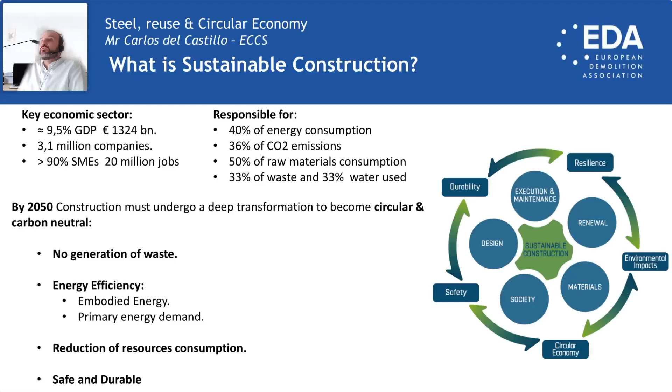In the end, we need safe, durable, and affordable buildings. So we need to implement all these activities and changes without compromising our core values.

Now, how does circular economy fit into sustainable construction? Well, it's one of the two main pillars. The first pillar is carbon neutrality, but then we also have circular economy.

Circular economy is really central to no waste generation, to energy efficiency—not so much the primary energy demand of buildings, meaning the energy buildings consume, but the embodied energy—and also to the reduction of resources during construction activities.

One important focus, and one of the objectives of this webinar, is to give a first step in setting connections: circular economy must be implemented along the supply chain. It is not possible to implement circular economy from just one position in the supply chain, or individually.

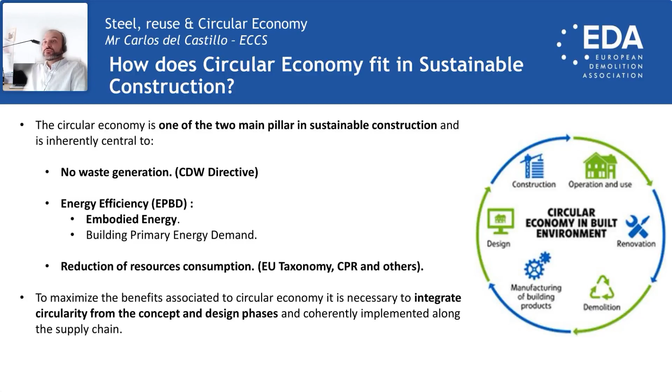So we will need to collaborate across design, construction, operation, renovation, demolition, and manufacturing of products. That means circularity really means circularity.

What are the environmental benefits of implementing circular economy in terms of the aspects I previously introduced? Firstly, no waste generation.

Europe has tried to reduce the waste generated by the construction and demolition industry through the Construction Demolition Waste Directive. Despite aiming for 70% recycling of waste, it really failed, and only about 50% was achieved, with very few exceptions. The truth is that in most cases it is downcycling or backfilling.

The new versions of this legislation and the implementation of the circular economy roadmap will set much more stringent requirements. We will have to be aware, because for the first time we will have regulations requiring us to use recycled, reused, or sustainably sourced materials. That means circular economy is going to be a requirement to be fulfilled also in new construction.

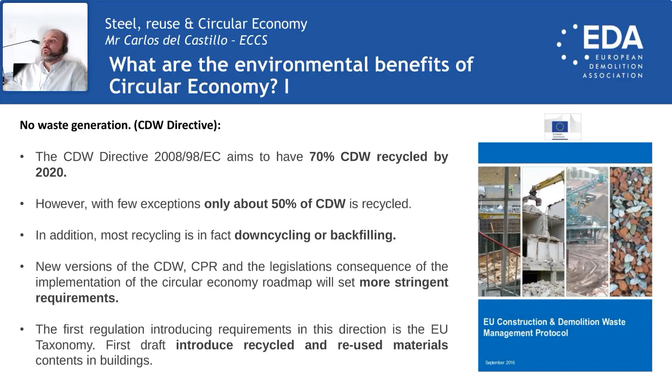Then we will have to focus on energy efficient buildings, where the EPBD, that's the Energy Performance of Buildings Directive, and the national regulations will set very stringent objectives in real terms. So, unlike the previous legislation I'm talking about, the EPBD has been very successful.

That means that the primary energy demand of buildings has really decreased. A very efficient building is not only more comfortable and better, but it's also cost efficient, meaning savings. So the energy consumed during the use phase is decreasing significantly, meaning the main net contributor to carbon footprint and global warming potential is going to be the embodied carbon - the energy used for materials.

And here is when the circular economy, through high quality recycling and particularly reuse, has the potential to reduce the carbon footprint. Basically, reuse of materials is a near zero carbon material. It's not only that we are saving raw materials, water, and energy, but the fact is that something reused, the only energy associated has to do with dismantling, transport, and maybe refurbishment or repair.

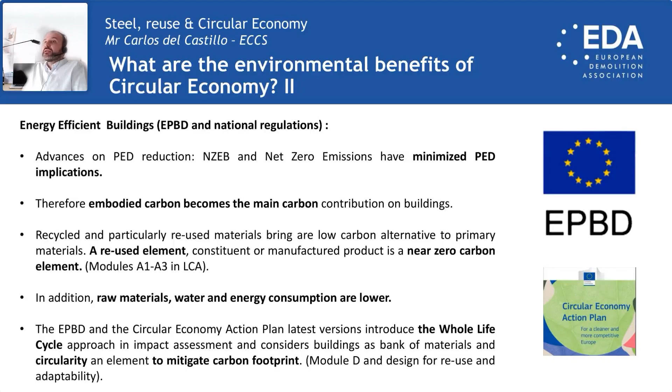Not only will we be able to integrate reused materials with a very low carbon footprint, but also it will be possible through the implementation of whole life cycle analysis for the benefits of circular economy and reuse to be capitalized through Module D life cycle analysis. We are moving from the current cradle-to-grave approach to a cradle-to-cradle approach, in which the end of life of materials and the environmental benefits associated to it can be claimed during the first stage.

And finally, we will have the reduction of resource consumption - that's something that the taxonomy, the CPR, and others will implement. As you may see in the legislations starting to define these levels, for example the EN 15978 standard, which regulates life cycle analysis at building level.

Here we can see that it's not only that we have to reuse, but we have to implement high quality recycling. That means reuse or pure stream recycling - those that really bring a benefit - will be the actions providing the highest value, while material recovery or energy recovery will be on the downsides of the table. So in order to qualify for circular economy, reuse or pure stream recycling will be necessary.

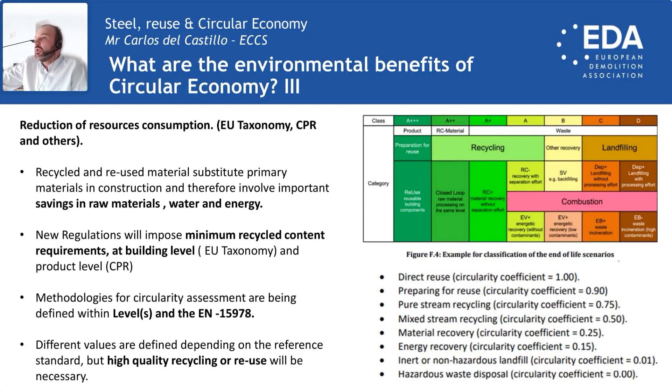So finally, is reuse the optimal end-of-life option for construction materials? Yes, for sure. Why? Because reuse, including design for reuse, means cost savings, increased revenues particularly for demolishers, and minimal footprint. I don't think any green technology will get the benefits of reuse.

We can do it in a very flexible way, from complete buildings to structures, manufactured products, or constituent products. We will generate almost no waste, and we have the chance to mitigate environmental burdens not only by using recycled or reused materials, but also by advancing the benefits of the circular economy. And also really important, it will generate local economic and social benefits.

That means it will be quite complicated to get everywhere this kind of new green materials, which will be associated to specific manufacturing sites where renewable energy is available, or where you have access to specific feedstocks of raw materials. However, reused material, if properly implemented, will be available everywhere.

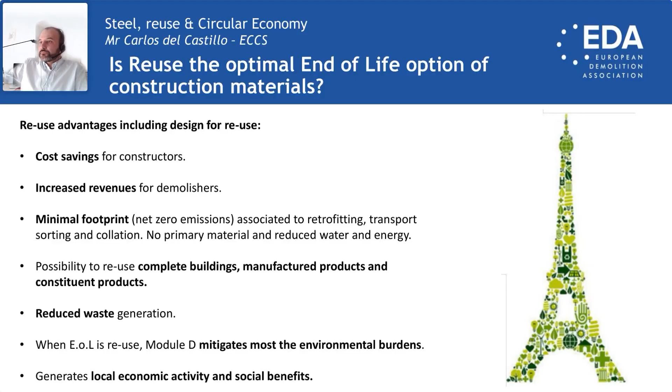And now I would like to move to part 3, in which I will address more specifically steel reuse in construction. So basically, I would like to start by saying that reuse is feasible for steel.

In fact, from the JRC reports, we can see that the problem with steel reuse is not the lack of technology - the problem is that there are no established practices. Unless steel has been exposed to radioactivity, fire, severe corrosion, severe fatigue loads, or plastic deformation, the fact is that we can really reuse it. And in the case that we cannot reuse the steel, then we have the possibility to use recycling as an end-of-life option.

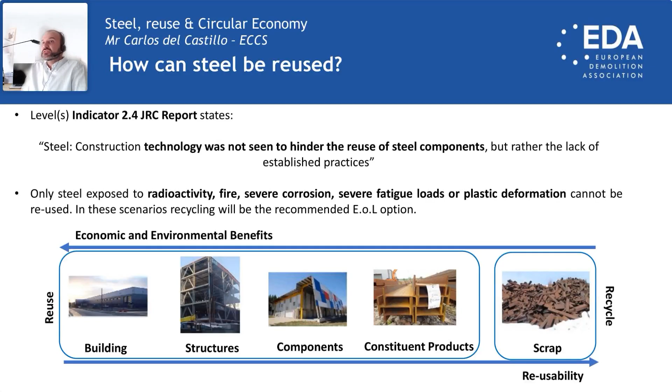Once we go into reuse, we have to pay attention to the economic benefits and the reusability, because we can reuse elements like the whole building, the structure, the components, constituent products, or scrap. The most benefits come from reusing direct structures or components, but the more reusability will be in the case of scrap. So we need to find a balance about what we are going to reuse, what we are going to recycle, and in which form we are going to recycle it.

How can steel be reused? That's fortunately easy, because clause 5.1 of EN 1090 Part 2 states that the use of constituent products not covered by harmonized standards is possible. In this case, what we have to do is provide the specification of the material properties. Fortunately, there are already standards and recommendations for how to do it.

All these guidelines are going to crystallize into a technical specification currently being developed by TC135. Of course, these guidelines have a scope and limitations, but there is enough material to proceed with the reuse of materials, particularly in execution classes 1 and 2, as we will see later.

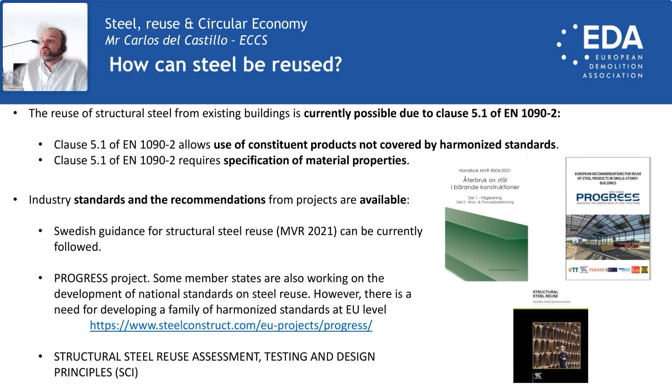Steel will also play an important role in reuse in construction, not only for the reuse of steel itself but by enabling the reuse of other materials. While steel is already a circular economy, and we are aware it is possible to reuse or recycle steel, and most steel is recycled, the reusability of buildings cannot only rely on the recovery or reclaiming of steel.

That means we need to also enable the reuse of, for example, precast concrete panels and CLT floor systems. This is possible by combining steel structures with bolted connections with these kinds of systems. While concrete can mostly be recycled as an aggregate, when you recover the full panel it keeps its structural properties. It's the same for CLT.

Maybe you can recover it by means of energy, or maybe you can do other kinds of recovery. But if you can reuse again the element, like a floor, then the benefits are higher in terms of economic and environmental benefits.

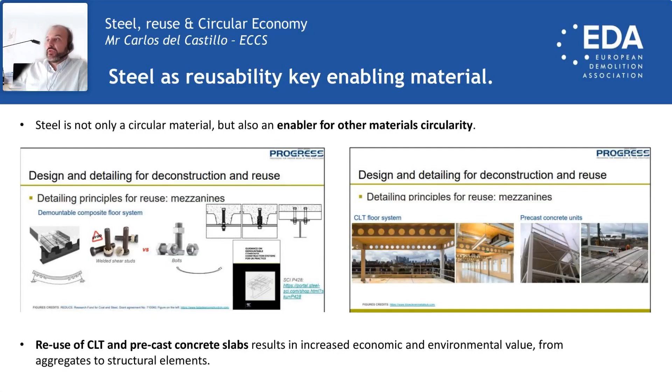We can also implement specific solutions and technologies to enable the circularity of envelopes. In the next years, in the circular economy roadmaps, you will see that envelopes, facades, and cladding are one of the elements that generate the main fraction of construction and demolition waste, and they are going to be asked to be designed for reuse, and reused when possible.

So here we have many solutions in which we are simplifying, based on and supported by steel, the secondary structure, so that at the end we can use long span elements that can be easily adapted for new uses, and also renovated or reused. Steel will play a key role, enabling other materials that traditionally have problems being reused, when combined with design for reuse. This means we are moving from pure construction to hybrid, composite, and multi-material approaches to construction.

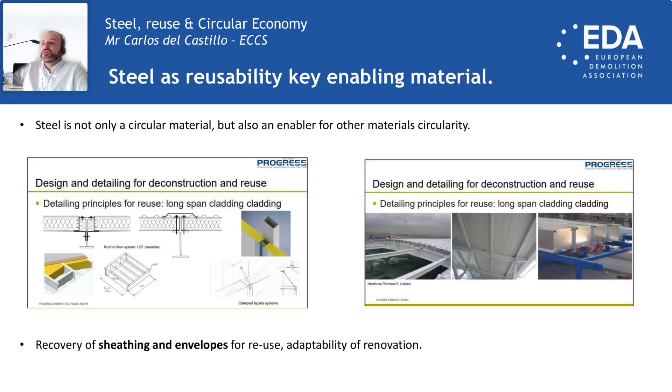What are the environmental and economic benefits associated with steel reuse? This can be applied to many other materials. For example...

Reused steel is a near zero carbon material. Primary steel involves 2.5 tons of carbon dioxide per ton of steel. If manufactured in an electric arc furnace, based on scrap, that could be up to half a ton of CO2 per ton of steel.

If we are talking about the most advanced solutions, such as the electric arc furnace with 100% scrap, fully powered by renewable energy, then you can halve that half a ton. But in any case, the secondary processes for rolling, forming, and so on will involve an important footprint.

However, with reuse, the global warming potential is only devoted to installation, transport, and retrofitting, and it's minimal—just 2% of that of primary steel. So we're not needing as much energy, we're not having the emissions, and we cannot only rely on constituent products, because the fact is that near-zero steel and other materials will not be so readily available. And if available, they will be local, expensive, and very likely over-demanded. Maybe construction is not even the best place for them.

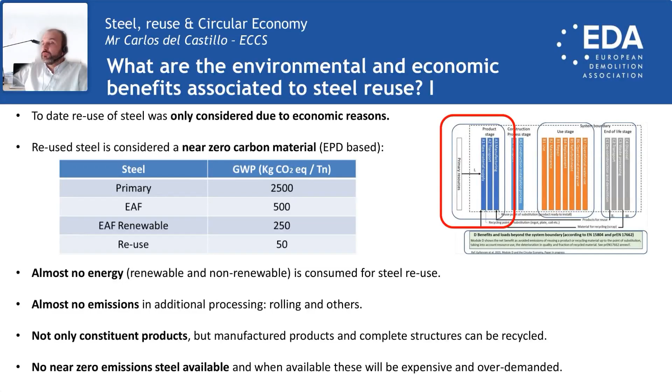So here we see that the benefit is not only economic, but also environmental. At the beginning, when we were considering only economic reasons, now there is a powerful environmental reason for the reuse of steel. And even when designing, as I said before, we have the chance to capitalize on the benefits of reuse or recycling—this is what is called Module D.

Module D refers to the benefits and loads beyond the system boundary. This means that the material that's recycled really involves a saving in the next life of the material, and you can claim it in advance in Module D. In the case of steel, the mitigation is really high—70% for recycling, and it could be even over 90% for reuse. The regulation I referred to before, EN 15978, which covers life cycle analysis in buildings, already splits scrap for reuse and scrap for recycling, so that means this will be accounted for differently.

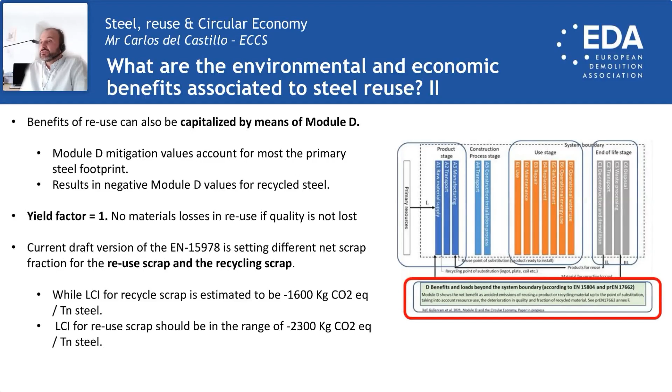Other benefits: when you are recovering and using recycled material, the Module D becomes negative. And if the end of life is reuse, then the Module D for recycling is also negative. Also very interesting—when you are reusing steel, 1 ton of steel becomes 1 ton of steel. But when you are recycling, 1.1 tons becomes 1 ton. So there is a loss of properties, a loss of material. Reuse is even more efficient.

So now let's see if there are already examples of reuse, now that we have the possibility, because EN 1090 is open for this. We have the guidance, and we also have some benefits identified. It is possible to reuse, yes, and there are many benefits. I'm going to briefly introduce four examples from the Progress project that I referred to before.

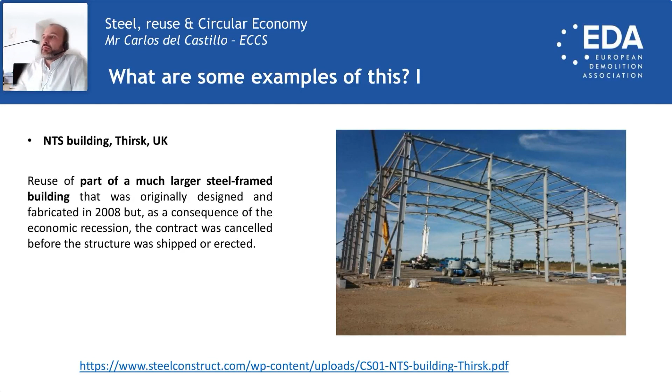Here we have, for example, an industrial building produced from another larger frame building, where a structure was taken and put in place in another area. This is the NTS building in Thirsk in the UK, and here you have the link to get a more detailed explanation. The Progress guidelines and webinars available on the ECCS website are full of valuable information that will make sure you know reuse is really a reality nowadays.

In this case, we have the Hidrotim office in Timisoara, Romania, where a hydraulic testing laboratory was transformed into a 5-story building. The complete structure—not just constituent products as in the other case—was used to make this new building. In this case, the complete structure was modified to produce these new office buildings. Again, you can find more information here.

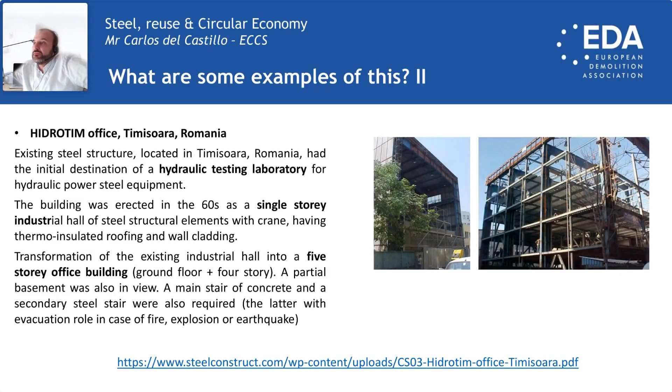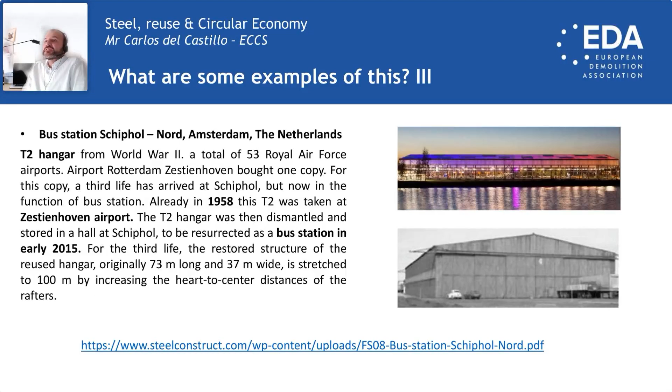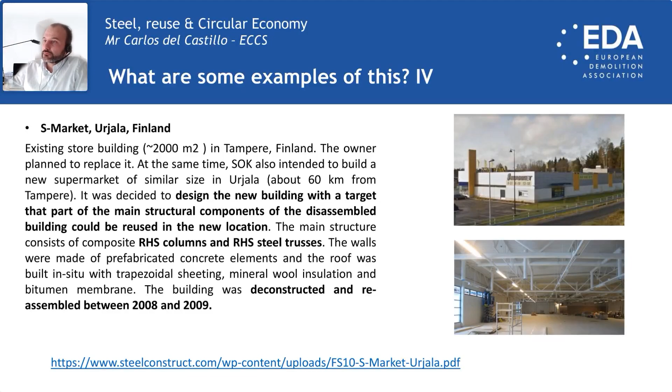Now that we have an overview of how steel can be recovered, how can it contribute to the recovery of other elements? In our last example, we see that it's not only that the steel structure was reused, but we also have the chance to recover the sheeting, the envelopes, and composite structures.

Then we have to evaluate what are the opportunities for the demolition industry. Nowadays, what is the current scenario? Well, steel is currently a consolidated circular economy, but it's based on recycling. 99% of steel is recovered. The data that I have is 6% is reused and 93% is recycled. I think that maybe the 6% is a little bit optimistic, but it's okay.

And 30% of the current production comes from scrap. That means that the scrap is melted for new steel, and this represents 30% of the overall volume of steel manufacturing. However, reuse is a niche practice limited to some profiles and maybe some stockists. So most of the steel is sent to scrap in arc furnaces.

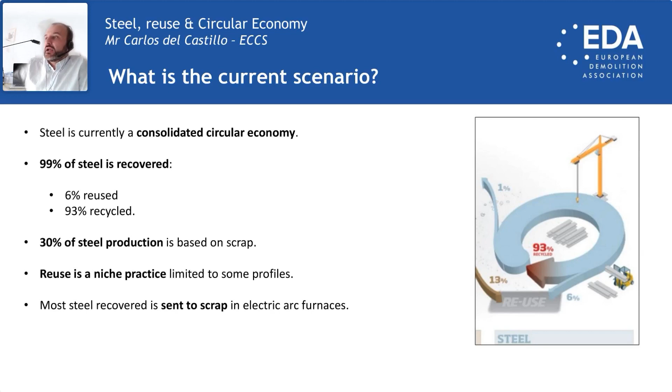But we can see that in the future, this is not going to be the case. What are the forecasts? Well, first of all, the green steel transition is going to imply relevant cost increases. I think that the new technologies that will be near zero will be based on direct reduction of iron. They will bring other technologies that we are not even aware of, but basically they will be more expensive.

Some forecasts from this consultancy that you see here indicate that basically the cost is going to be about almost double the standard price. And also, due to the implementation of circular economy, 50 to 70% of the materials will be based on scrap. So that means that it's going to be electric furnace.

What happens is that we have a really important potential for reuse to become a common practice. We will see that we will get higher benefit than selling scrap. And also we will have a scenario in which design for reuse, efficient dismountability techniques, and building digital passports are key.

That means that all the information that we need for recycling and reuse will be available on our BIM models, the same as our EPDs, which will be online or available in repositories. So it will not be so complicated to get the certificates, which will make reuse quite feasible.

I think that, but this is a pure estimation, it will be possible that 10 to 20% of the final steel production comes from reuse. So that means that just by implementing new practices that are cost efficient and generate benefits for the economy, we can really mitigate 20% of the footprint of steel, and also do it in a very efficient, sustainable way.

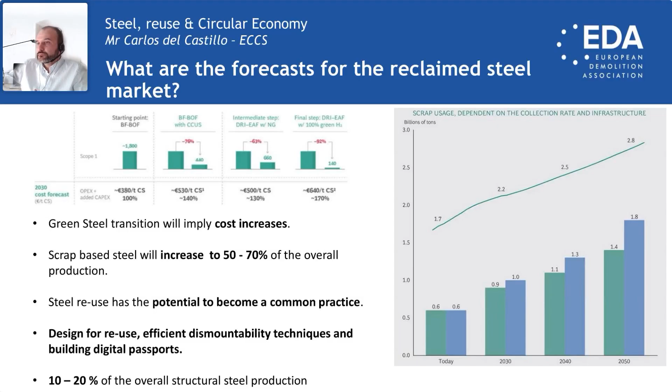Good. And now, how can we identify these materials in buildings? Well, from the ECCS and our network, we have conducted interesting work on that, and also some introductions have been made, I think, also in this forum by VTT. But we need to integrate these procedures in guidelines and the pre-demolition audits.

Basically, the feasibility of recovery will depend on the availability of certificates. That means all the documents regarding the building, the date of production, steel and other materials. In the case of steel before the 1970s, it's a more complex material. We cannot be as sure as when using what we call modern steel.

The building history, so we assure that there was no fire, no earthquakes, no exposure to strange conditions. And of course, the execution classes that have to do with the building design and the design for reuse. But if we are talking about quasi-static execution class 1 or execution class 2 buildings, it's not so crazy to think that buildings can be reused, or the constituent products can be reused.

Particularly in the future when the BIM models and the digital passports will really collect all the necessary information to make sure that we have this information available. So I think it's important to gradually, and according to available technology and information, integrate the reuse of steel and also other components if designed for reuse, into pre-demolition audits.

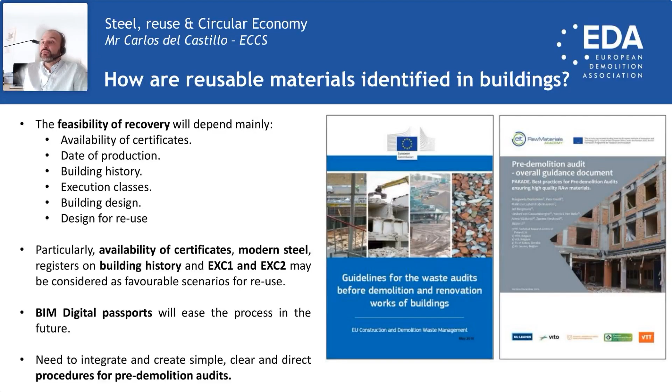So then is when we need to think about how steel is recovered, and that means the contributions from the demolishers. The work that we are conducting up to now is based on what we think the demolishers do, but we are not sure of what we are really doing. So I think it makes sense that we start working on what is the available technology.

In fact, reuse is going to have, the way that steel is reused will have a huge impact on the reusability and the feasibility of reuse. So despite there being a trend to develop systems for its reuse, we have to take into account that this will only be available for future buildings. But we also need to recycle what is available on existing buildings, and not limit ourselves to steel.

If the only component that we can extract that provides a benefit is steel, then we will have an economic complication. Why? Because at the end it's only one component and I have to implement much more complex processes. So the more materials that we can recover, the better the economic feasibility of the system will be.

And there are bolted structures that have been prepared for reuse, but they are not so widespread. At the end, we need to understand that excavators and gas or cut shears are going to be the most implemented techniques. So we will have to think about what is possible and work on what is possible, creating a forum, a collaboration with EDA.

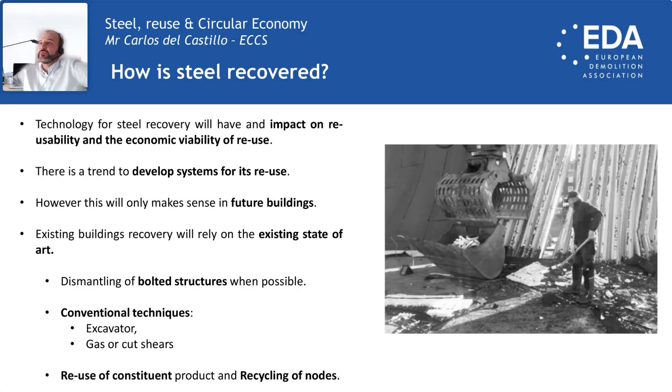Okay, and then we will have to think about how to introduce it into the market. Now, reclaimed steel is not easily available. There are some stockists who can make this available. And depending on the owner of the building, apart from very few sites in which they can sell profiles from demolition sites, it's not so easy. So it is only for very few products and related to the stocks available.

The main reason is an economic driver, and in the case that it's not an economic driver, it's mainly related to lighthouse projects, in which it's some kind of exotic practice, where I can tell that I have recovered some component, that I have done something very sustainable, or that can be close to marketing. But it's not something systematic, and it's not something we are implementing in order to recover as much material as possible.

So we will have to work on how to build these tools to introduce reused steel and other components in the market. And we will have to do it with clear responsibilities, because the fact is that now the responsibility - who's responsible and what are the consequences of recovery, what are the consequences of certifications - is not specifically allocated. And also we have different possible testing protocols. So there is a need here to improve the way that reused steel is going to be introduced in the market. But nowadays it is possible, and it's mainly related to stockists or demolishers.

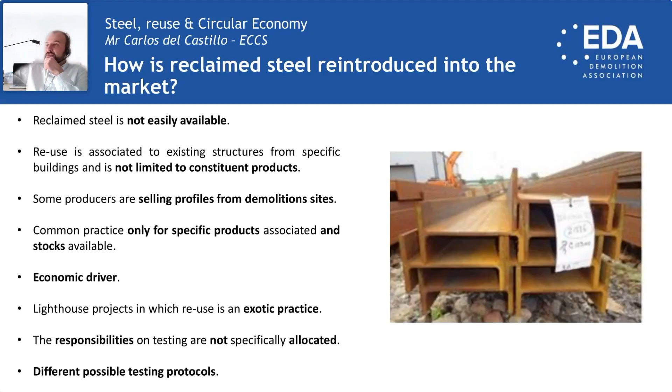Okay, so once we have provided an overview of what is currently possible and the way that reuse is implemented, then we can go for the challenges for the demolition industries. The challenges, they are, of course, also opportunities.

The first thing that for me is critical is collaborating along the supply chain. As I have said before, it is impossible to go into the circular economy just from an individual perspective. At the end, we need to involve all the supply chains because knowledge is distributed. That means that demolishers have a real clear understanding of what can be recovered and how to reclaim materials, but they may not have the knowledge about the different phenomena happening during the life of the building or the dismantling, and what can create a situation in which reuse is precluded or prevented. So it is necessary to create a common place in which all the stakeholders in the supply chain can set a dialogue.

If we are not aware of the other stakeholder practices and the limitations of the different stages, and the design is not done in order to reuse, we are not building to allow reuse, and we are not considering that some operation situations will generate problems, then we will be assuming risk and making recurrent mistakes.

That means that on the one hand, the supply chain will be broken, so there will not be circular economy. And on the other hand, we will have parallel processes, not consistent, in which it will be very complicated to harmonize and extend. So we need to cooperate along the supply chain at EU level and agree the scopes, and not only for steel.

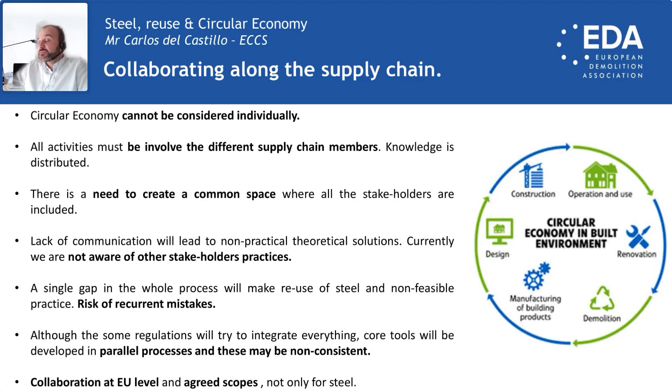From the beginning, and considering that the market is quite segmented, we need to do it in a way that the different providers of services are not acting independently. At the end, we need to have some common practices, and as I said before, a common space to talk about how to implement reuse.

Then we will have to develop the optimal tools, and we will have two different scenarios: on the one hand, when we are working with an existing building, and when we are thinking about future reuse in new buildings. In the case of existing buildings, there will be limitations because they have not been designed for being reused, and it will not be easy to get the necessary information on the certifications, on the designs.

On the drawings and everything that could be necessary, or even the history of the buildings. So we will have different limitations in tools for recovery, in the existing information, and we will very likely have to assume a very conservative approach.

While when we are talking about new buildings, the declaration of performance will be available. They will be digitally available. So we will have BIM models, passports designed for reuse, optimized deinstallation processes that at the end will be designed specifically for reuse. And here is when we can set reuse like a common practice.

I think that very likely for execution classes 1 and 2, partially in execution class 3, but for sure in execution classes 1 and 2, reuse can become a common practice that can have even a similar share to scrap. That means remelting for producing new materials. And it's important that we will have to develop tools and methodologies according to real needs.

I think that there are two main risks on reuse. On the one hand is reusing what is not safe, and what at the end can create very risky situations and even fatalities. And of course, trying to reuse something that is ultra complex and is far from being cost efficient. So we will have to be very, very cautious and focus our actions just to get benefit, to create economic impact, and to do something in which we feel safe.

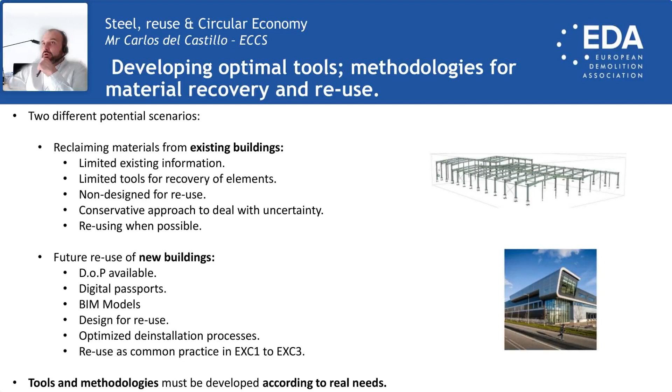And at the end, we should not have any kind of hesitation about, okay, is this legal? It is not. It is risky. I am doing something crazy. We need to work in this direction.

So now going on the development of tools for existing buildings, we have to do it progressively according to real needs. So we need to understand what is feasible and what could be common practice. And I think that constituent products for industrial warehouses, particularly single and few stories in low seismic activity areas, is a set of the market that is very compatible with reuse.

And there it is possible to get important amounts of materials and not only steel. There are also some interesting opportunities, and for example, multi-story buildings with composite slabs that represent huge shares of the markets in some countries.

So we will have to work on the assessment protocols of fatigue, and also we will have to work on the methodologies to recover and to split the slab from the structure, the primary and secondary structure, and to finally evaluate the different components, including welds. The assessment of welds is something that is not currently developed, and we will have to do it.

And all these processes we will have to do while we are implementing activities to support the adoption of reuse in new buildings. So what we discover working in existing buildings, we have to translate into new buildings to prevent this happening in the future and also to maximize the reuse practices.

So we need to avoid investing efforts in what should not be reused because it is very risky and because it's not cost effective or is simply some kind of exotic practice for marketing. Well, if you can afford it, it's okay.

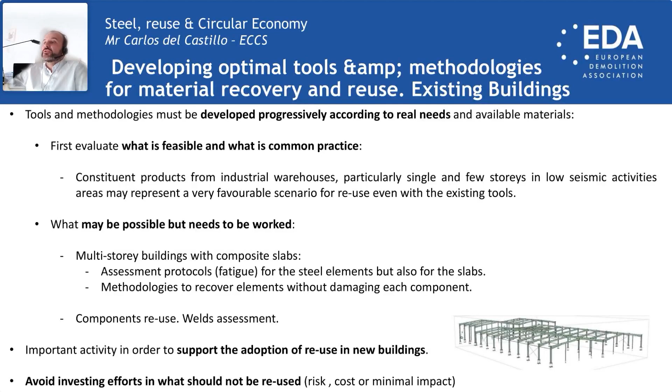Okay, for new buildings, then we have to develop the methodologies to maximize the share of reuse, not only steel, but other elements also in buildings.

So we need to develop cost-efficient design for reuse and adaptability approaches, not very complex academic solutions that at the end are very hard to build, but also to dismantle. We will have to develop the tools that really make everything available.

We need to work on monitoring activities like seismic activity, fatigue or loads that could create problems, and introduce concepts - for example, now seismic activity may be a critical issue because of execution classes.

What is execution class 2 in a low seismic area is execution class 3 in a medium or high seismic activity area. So some technologies that have been designed to prevent plastic damages on structures in the case of seismic activity maybe could make sense to be developed.

And also the methodologies to evaluate the fatigue, loads, and to extend to all kinds of components.

And finally, we will have to develop the methodologies for making decisions about retrofitting, refurbishment, recovering a structure, building, or whatever. So it's important that everything is coordinated so we avoid inconsistencies and ensure interoperability.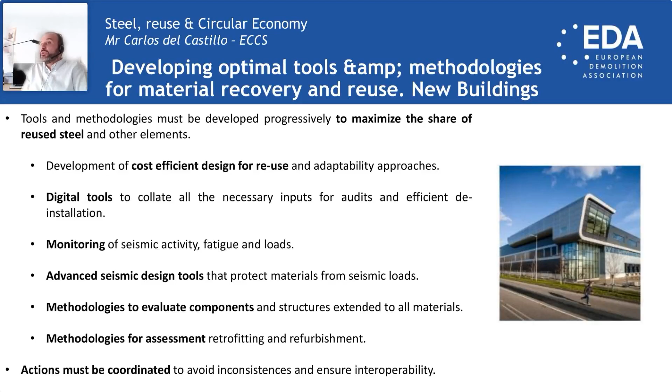Okay, once we have the tools, then we will have to work on creating a legal framework that even if something happens - and we don't want this to happen - that legality is with us and we can demonstrate that what we have done is sensible, is safe, and it's only an exemption.

I will explain this very briefly later because I think that its regulation is only the subject for a webinar.

Then we have the CEN committees, and particularly TC135 is within this committee. There is a technical specification on reuse being developed, but there is also another on assessment and retrofitting of existing buildings and refurbishment of buildings. And they are in different committees.

It's curious. So coordinating these activities is going to involve efforts, because it makes no sense that what we are doing in one committee uses different evaluation protocols or tools than another.

And finally, we have the EPBD, the taxonomy, levels, the ISO, Construction and Demolition Waste Directive, the Circular Economy Roadmap, where the requirements in terms of values and also the quantification methodologies are going to be defined.

So we need to make everything coherent, so that at the end, what is being stated in one regulation is not making null what we are doing in others.